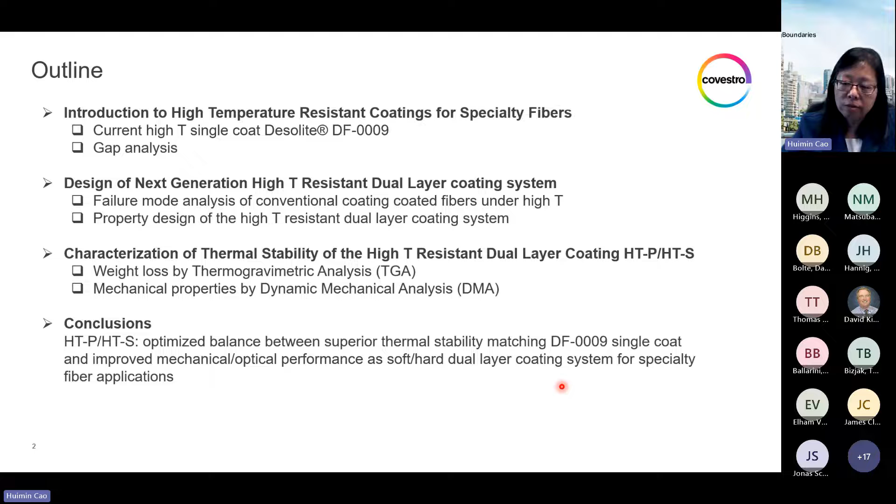To explain the design of our new dual layer system, I will show a failure mode analysis of how conventional standard coating would fail under high temperature aging, and how we designed our new coating system to avoid these failure modes. The high temperature stability is characterized in the lab with film samples by a commonly used weight loss measurement via TGA and mechanical properties via DMA. This presentation only covers the film study, but the conclusions were drawn based also on successful qualification trials from fiber manufacturers.

This DF-0009 single coat was introduced in 2009, and it has been successfully applied in a variety of specialty fiber applications under harsh high temperature environments. It's specified as suitable for long to mid-term use at temperature range of 100 to 150 degrees C, or short-term use at high temperature range of 150 to 200 degrees C.

Several papers from our company at that time, DSM Desotech, describe the development of this single coat UV curable material, which is based on a non-urethane acrylate chemistry.

These papers showed that the typical urethane acrylate chemistry used in regular optical fiber coatings suffers from severe coating degradation due to the urethane linkage, which is more prone to break under high temperature, the lower the modulus - the more severe the weight loss, which represents the degree of polymer degradation. In comparison, the non-urethane-based chemistry is much more stable and not as sensitive to different levels of modulus.

DF-0009 was designed at around 700 megapascal, which is a medium-high level, appropriate for a single coat.

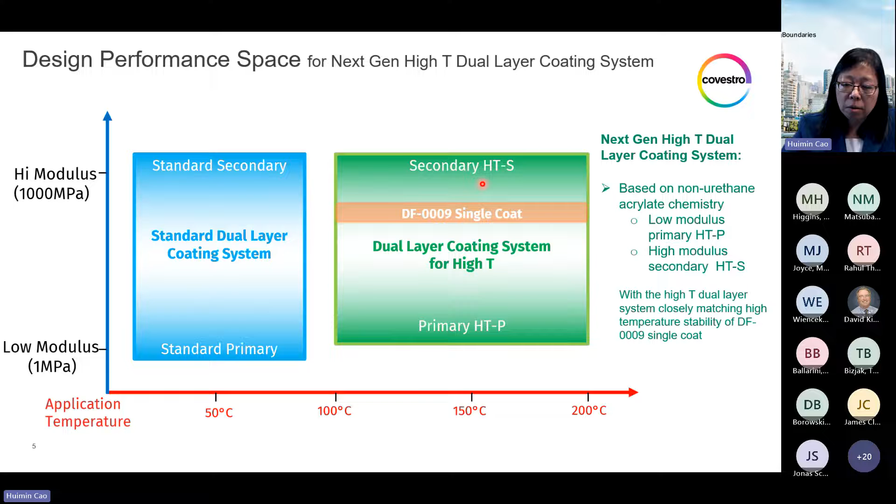Before we dive into how we designed our new coating system, it is important to understand the general polymer thermal degradation mechanism. At the high temperature range relevant to this specialty fiber application, at least higher than 100 degrees C, hydrolysis polymer degradation is no longer relevant because of lack of moisture at those extremely high temperatures. So the main degradation mechanism is from thermal oxidation, plus some thermal pyrolysis.

Thermal oxidation is a free radical chain reaction process where oxygen not only plays the role of propagating the radicals, but also plays the role of auto-acceleration by chain branching, through a hydroperoxide that decomposes into two radicals. One of the radicals is an oxy radical, which is very unstable and readily undergoes chain scission.

The consequence of the chain scission is breaking down the cross-linking network of the material, making it weaker. As the termination of this chain reaction, when two radicals combine with each other, it can also form crosslinks, and this additional cross-linking reaction will make the material brittle. Between these two effects, which one dominates depends on the material network structure, which I will discuss next.

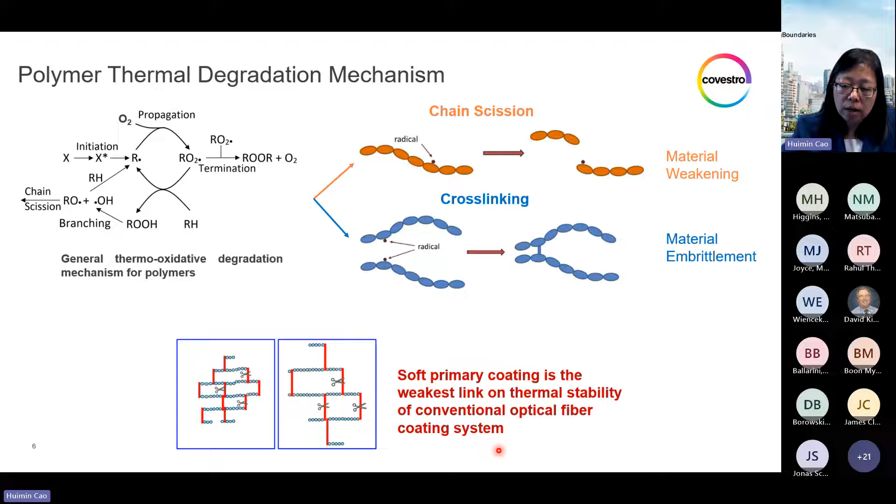Here's the actual illustration of how a fiber coated with a conventional urethane acrylate-based dual layer coating system degraded under high temperature aging. Picture A shows a fiber just under 1 day of 180-degree aging. Even just from handling this fiber, it easily formed defects in the primary coating, shown as cavities. This is because the primary coating at this point already turned into a soft gel after the network broke down from the chain scission process.

Also, the weight loss from the primary coating is much more significant than the secondary coating. So the primary coating layer is actually under high triaxial tensile stress, which makes cavitation easily form and widely open as empty voids due to this triaxial tensile stress.

With the primary coating losing integrity, this fiber can be easily tubed off by hand, simply taking off both layers of coating as a tube, leaving a lot of very sticky residue of the gel-like primary coating layer on the fiber.

Picture B is the same fiber when wound into a small coil after 5 days of 180-degree aging. When unwinding this coil back to straight, this fiber was observed with the glass completely shifted to one side. So this bottom side has no primary coating at all, and all the primary squeezed to the upper side.

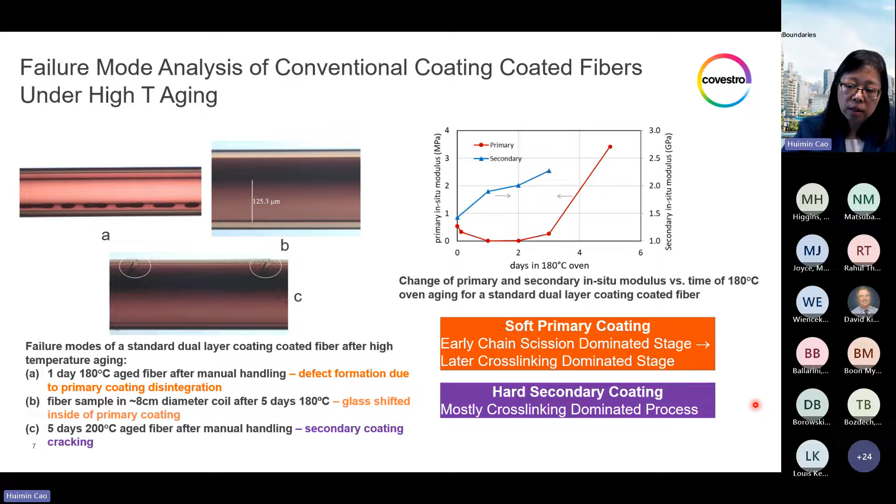So in summary, at high temperature, the soft primary coating first undergoes a chain scission dominated process, and then later a cross-linking dominated stage into a disintegrated fragile material. The hard secondary coating undergoes mostly a cross-linking dominated process into a brittle material.

With that understanding, we designed our new dual-layer system with non-urethane acrylate chemistry to avoid those failure modes. The HTP is designed at a modulus level around 5 megapascal, slightly higher than a regular primary coating to avoid severe network breakdown from chain scission, but still significantly lower than the single coat DF-0009.

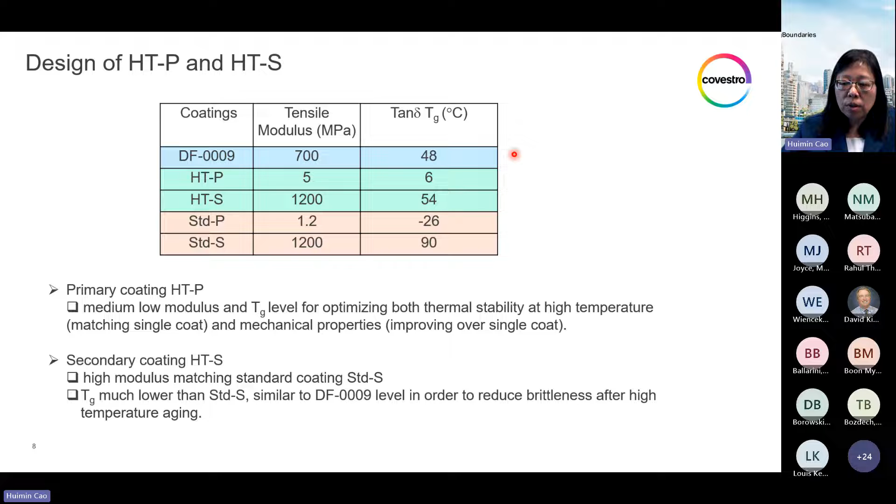To improve the microbending performance, the secondary coating is designed at the same modulus level as a regular secondary, but with a TG design lower than the regular secondary coating, more similar to the single coat. This is to avoid embrittlement after aging.

Here is a dynamic TGA weight loss comparison of these coatings, a quick way of ranking thermal stability of different materials. The onset temperature, or oxidation induction temperature (OIT), is an important parameter to rank thermal stability. As you can see, the HTP has only a slightly lower onset temperature than the single coat, and it is way higher than a standard primary. HTS, of course, is even slightly higher than the single coat and way higher than the standard secondary coating.

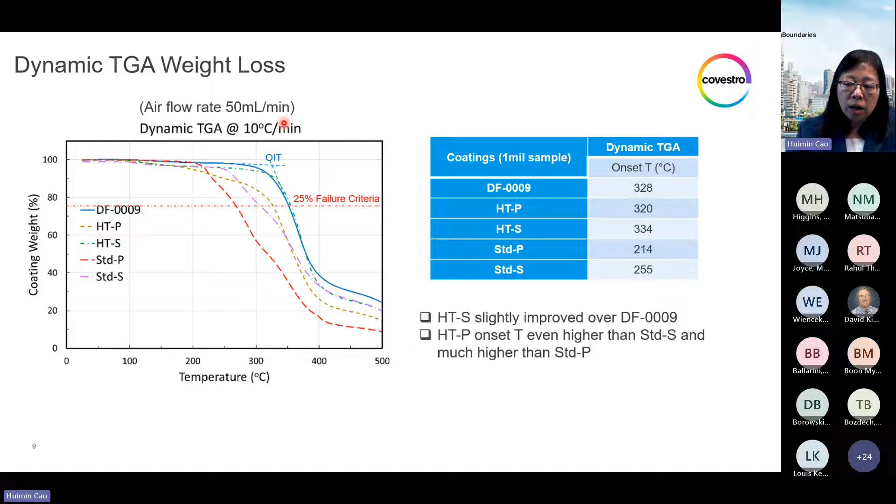One thing to notice is the test condition uses an airflow rate of 50 milliliters per minute for this TGA test, and this is an arbitrary test condition set for TGA experiments.

The indication of this is the coating degradation behavior is very sensitive to the local oxygen concentration sitting on top of the coating. So when the oxygen is consumed from the coating's thermal oxidation reaction, it needs to be replenished from fresh air to maintain the reaction rate.

This finding could lead to an expectation that in actual field conditions, where these fibers are often in a very high fiber density cable with not much free space of air, and the airflow is also restricted by the cable jacket, the actual coating degradation rate in cable structure could be much slower than predicted from these lab TGA film tests. So the purpose of this lab experiment is mainly for ranking the relative trend of thermal stability of different materials. But even with that expectation, you still shouldn't run the risk of using a conventional urethane acrylate-based coating for your actual application.

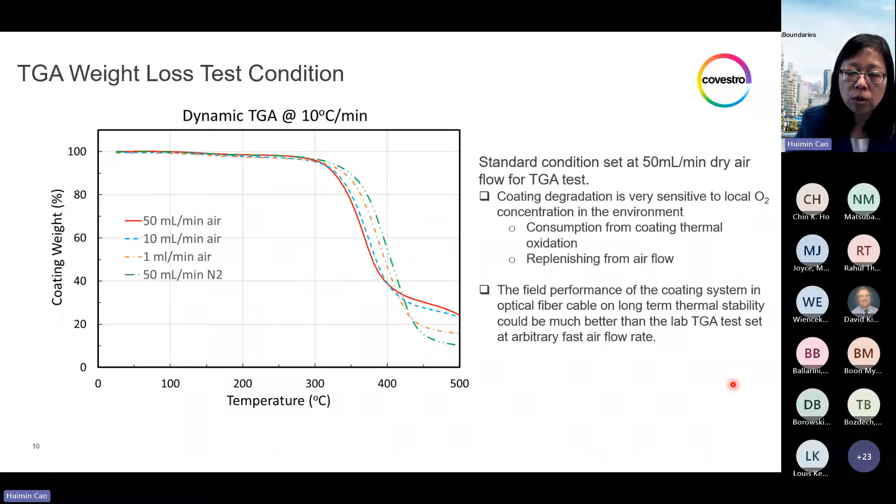It will still cause field stability issues, durability issues in the long term. These specially designed high temperature resistant coatings are highly desirable. It's just to show that whatever we predicted in the lab test should not be interpreted as an absolute value, but in a relative ranking sense.

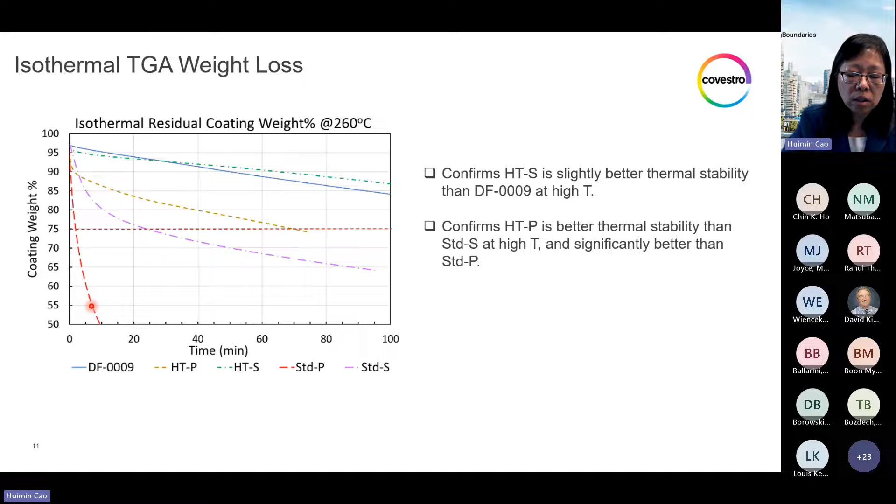This chart shows the isotherm TGA results held at 260 degrees C, where the HTS has a slightly slower weight loss rate than DF-0009, and the HTP is actually much better than the regular secondary coating. Consider its modulus is 100 times lower than the standard secondary - this is quite remarkable. And of course, it's significantly better than the standard primary, which cannot survive at all in these extremely high temperature conditions. It's very risky to use this kind of coating in a high temperature environment.

Why are we testing in this extremely high temperature condition? It is for Arrhenius study, where you do accelerated lab testing at a temperature range much higher than your application temperature. In our case, up to 300 degrees C, which makes it possible as a short-term test.

Based on the Arrhenius equation of a straight line fit, you can predict the lifetime in your field application at lower temperature. The Y axis is the log scale of the time when reaching a 25 weight percent loss, which is defined as a failure criteria commonly used in the literature.

As you can see, the HTS performed the best, even slightly better than the DF-0009. And even the HTP still lasted longer than the standard secondary coating, and significantly better than the standard primary coating. Based on this study, the lifetime prediction is drawn in this chart. For example, at 140 degrees C, the standard primary only lasted a couple of days before losing 25 weight percent, while the HTP is predicted to last almost a year.

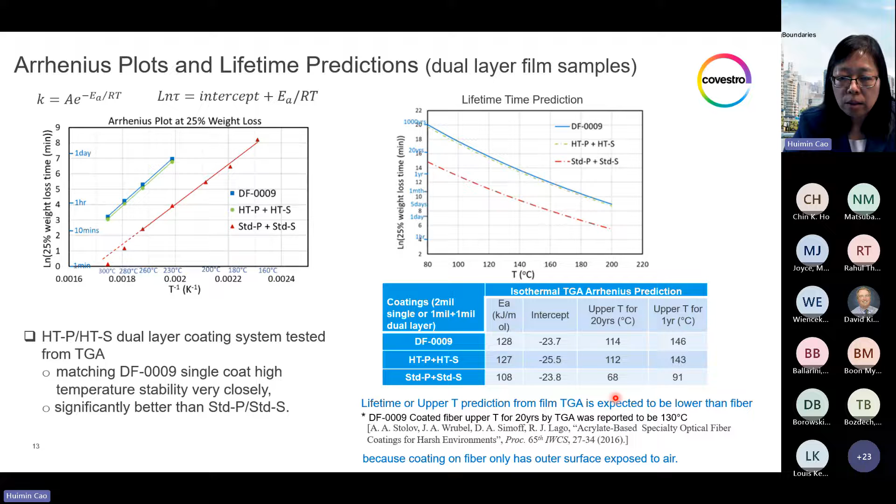So once again, all these predictions are only for relative ranking purposes.

Another traditional test is the oven testing. After 5 days of 180 degrees C oven aging, the standard primary turned into completely dark material, and it is a char-like material, probably only carbon left. There's no integrity at all of this coating after 5 days at 180 degrees C. It cannot peel from the aluminum pan as a film anymore, it just chips off. The HTP is still a very nice film, only with some degree of yellowing.

The HTS is not only a very nice film, but also non-yellowing at all, which is better than the single coat. If you look at the weight loss from this oven testing at the high temperature ranges, it shows clearly that the high temperature coatings are much better than the standard primary and secondary coating. But it's worthwhile to note that at low temperature ranges, such as 125, 150, the standard P and standard S did not appear to have a higher weight loss than the high temperature coating.

This is only the case in oven testing, not in TGA, because in TGA, the standard coating, even at this relatively low temperature, still shows higher weight loss, significantly higher than the high temperature coating. The difference is that in the oven, at these relatively lower temperatures, there still might be some moisture content left, while in the TGA it's dry air. So the weight loss from the oven test is no longer a proper parameter to evaluate the coating degradation at these relatively low temperatures.

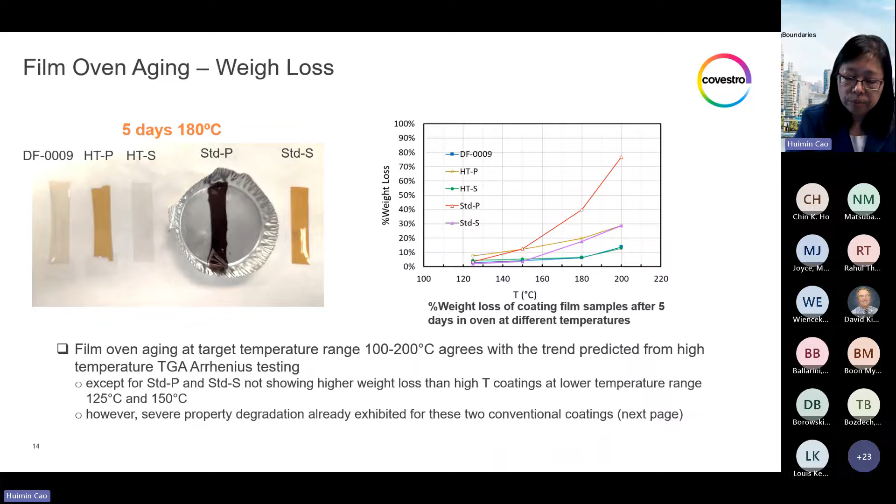Here is how we characterize the thermal property change with the aging. It's characterized by DMA, by looking at the equilibrium modulus change, which represents the cross-link density of the material, and the tan delta represents the glass transition.

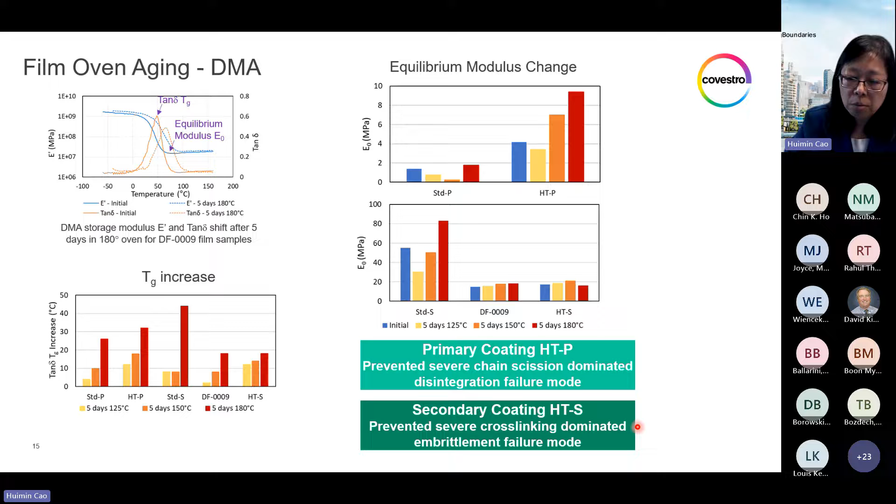The high temperature HTS shows a remarkable stable equilibrium modulus, similar to DF-0009, very stable and much better than the stability of the standard secondary coating. The Tg shift is also much lower than the standard secondary coating, which will result in a much better retention of material toughness, avoiding the failure mode of embrittlement, secondary embrittlement at high temperature.

So in summary, we have analyzed the different failure modes of conventional primary and secondary coating and designed our new primary coating to effectively avoid these failure modes. The thermal stability has been tested closely matching single coat DF-0009 from film TGA, DMA test, and fiber testing.

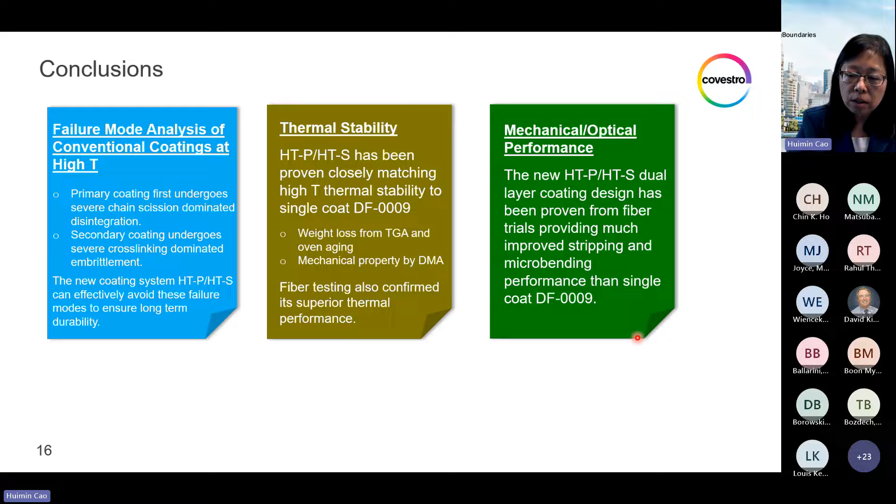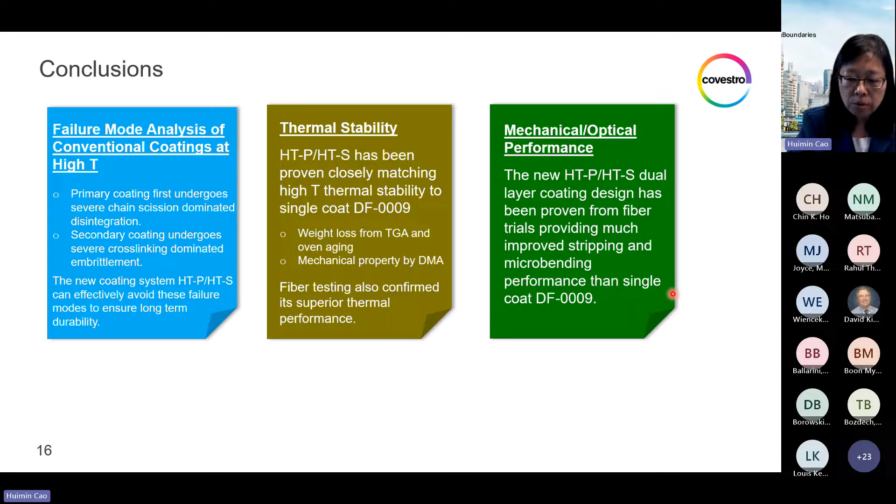Which is not discussed in this paper, also confirmed its superior thermal performance at high temperature. And the fiber trials from qualification also confirmed that the new dual layer coating coated fiber provided much improved lower strip force and much better microbending performance than single coat coated fiber. So this new high temperature resistant dual layer coating system, HTP, HTS, has been successfully qualified from fiber and cable testing for specialty fiber applications at this high temperature environment.

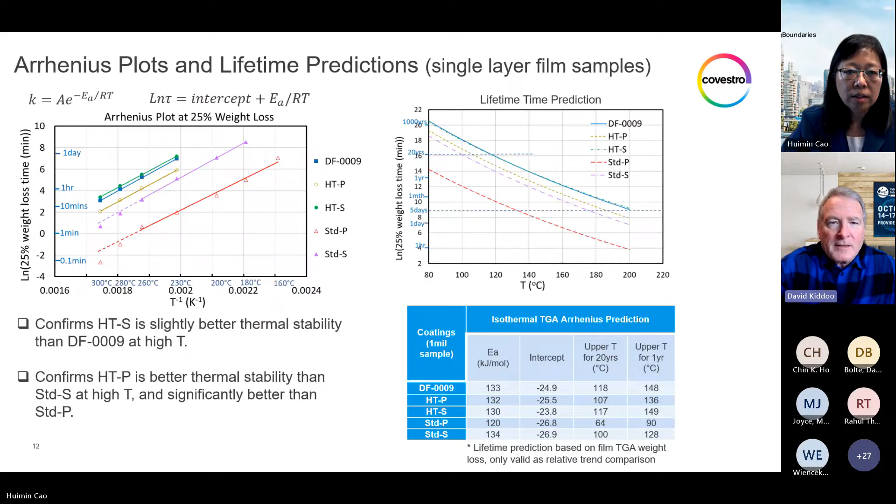But for what types of applications are these dual layer high temp coated fibers designed for? Are they currently commercial in any particular applications that we can relate to, or is it a wide variety? I mean, is it indoor, outdoor?

These are information that we have only very general information from our customer. Of course, the very detailed application can only be provided by the industry. What are they using our current DF-0009 for? For example, aerospace applications, satellite, automotive is what we heard most.

High power laser is another very popular application. Oil rigs and some mechanical devices that will be under a high temperature type of environment. And of course, different customers may have different specialty applications, but DF-0009 as a single coat has been commercially used for these applications in the past 15 years with very good feedback.

And this dual layer coating is just to overcome some performance aspects in terms of strip force, in terms of optical performance, but maintaining the thermal stability as if a single coat.

In addition to the mechanical integrity that you were describing, is there also any chemical resistance, any fluid resistance in some of these applications that might be required?

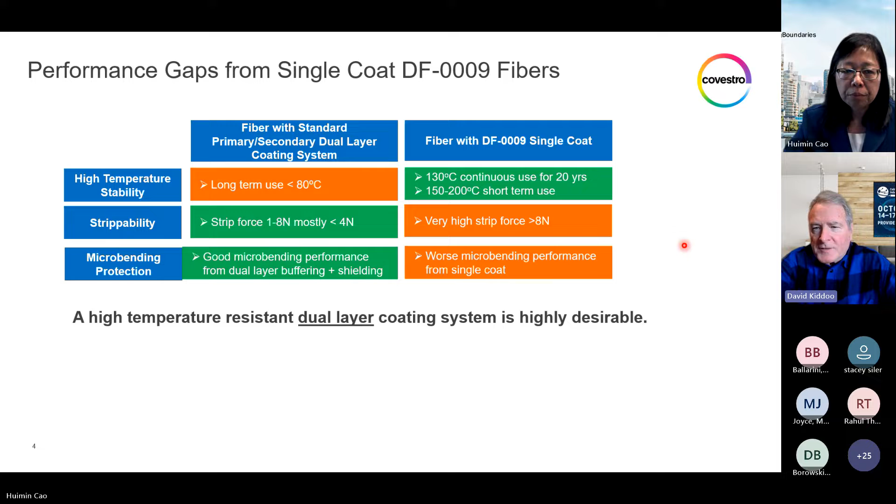Also, similar to the previous question, for medical applications specifically, do you expect the coating to be biocompatible? And obviously the issue again is fluid compatibility. That's never been tested.

For any medical devices, if it goes into the human body, it needs to be carefully examined and evaluated. There'll be actual tests that need to be done. For some of these medical devices, what you're thinking of are more external types of devices, like operating room devices, right? Yeah, yeah. Very good.